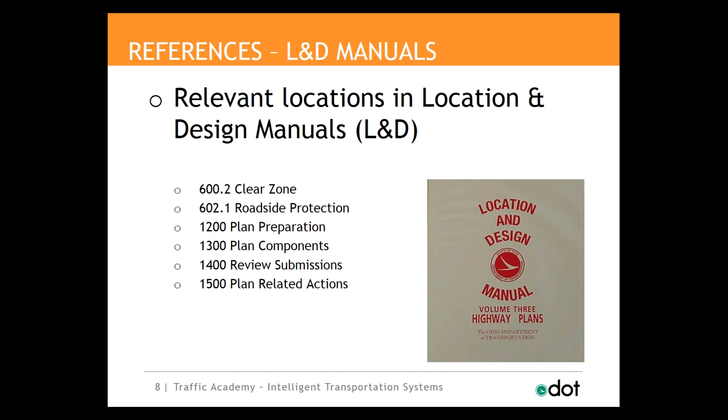The next reference is the Traffic Engineering Manual, which I'm sure many people are familiar with, having likely gone through the traffic signal portion of this course. This manual is a consolidation of traffic engineering policies, guidelines, standards, and best practices. A lot of what we cover today is discussed in the TEM. The main relevant sections within the TEM are Part 1, which includes general information on the manual itself, standard construction drawings, design information, and reference materials. Part 4, which includes information on traffic signals. And Part 13 is where the ITS information is located.

Other parts that may include some information that could be used on an ITS project include the signs, markings, and temporary traffic control device sections. Now, this manual is updated twice a year, in January and July, unless there's a critical update which requires it to be updated sooner.

You should always review Section 800 of the Supplemental Specifications to see what revisions have been made to the remaining specifications. The main specifications you'll need to pay attention to for ITS are Sections 804, 904, 809, and 909. These cover the majority of the ITS devices that will be deployed. You can see there are some other sections with pretty specific ITS applications, but for the most part those other four sections will cover the majority of the devices.

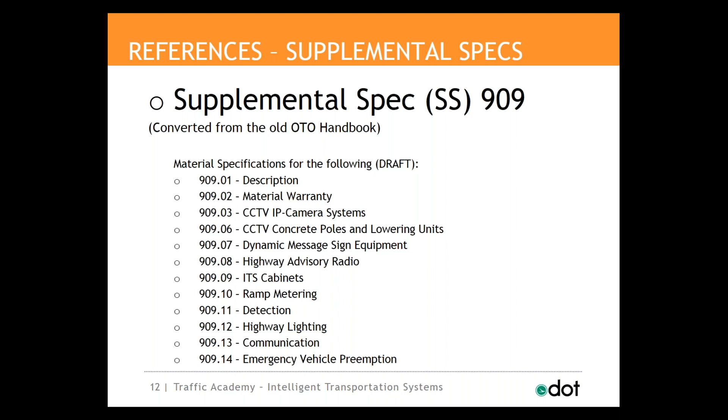Now, there are also standard construction drawings. These details eliminate the need to create new details for each project. They're making it easier to include ITS in the projects by having these standards out there. Certain situations may require slight modifications from the standards, so if that's necessary, they should be modified and included in the plan set. Drawings include CCTV assemblies with both ground-mounted and pole-mounted cabinets, pull boxes and conduits, dynamic message signs, grounding, transformers, work pads and sloped areas, microwave sensors, and ramp meters. These drawings are updated twice a year also, in January and July.

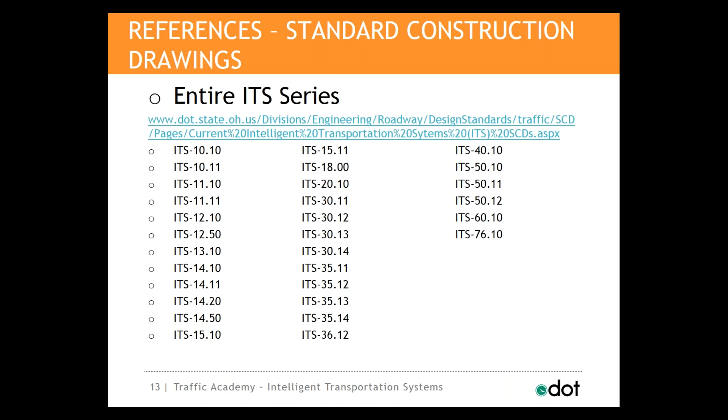Similar to the construction material specification, there are relevant drawings in other sections of the standard construction drawings. Particularly in the highway lighting and the traffic control sections, you can find a lot of supporting drawings that would be used in ITS projects. So as I mentioned before, take a look at other areas, make sure that these associated ITS devices aren't covered in other sections.

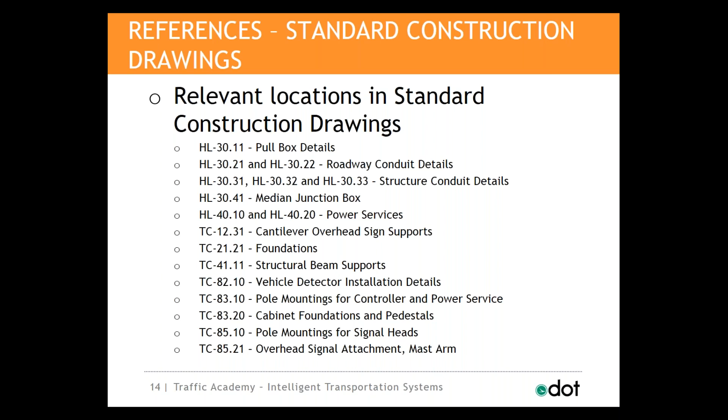Now, there are also some plan insert sheets to take note of. These are not typically used unless there's a unique situation, but they can be found on the Resource Center list under the Traffic Standard Drawings. These may be phased out in the future, but for now they are still out there.

The Traffic Authorized Products list is one of 3 locations where approved products can be found. For a device to be listed on the TAP, it needs to meet the 909 Supplemental Specifications, previously the handbook. There are processes for designers, contractors, and manufacturers to use the TAP.

For designers, not all products on the TAP will meet the needs of an ITS project. So design engineers must confirm that the product on the TAP meets their project needs. If it does not, the designer must follow the guidelines for obtaining approval of the proposed product.

To get a new product on the TAP, there is a detailed product submittal and review process that a manufacturer would need to follow. This is updated quarterly.

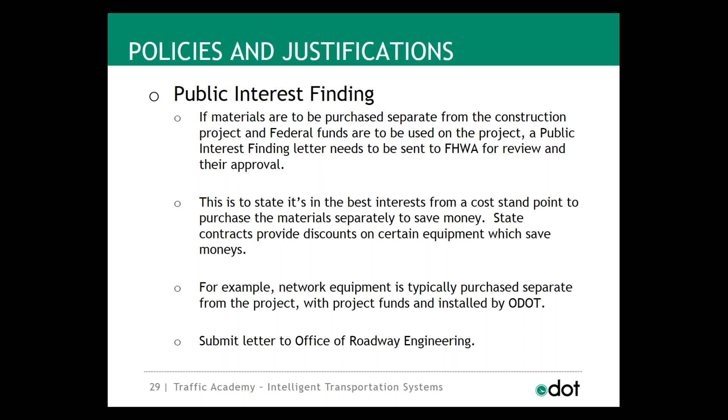True or false, CFR 940 is not required for a project using only local funds.

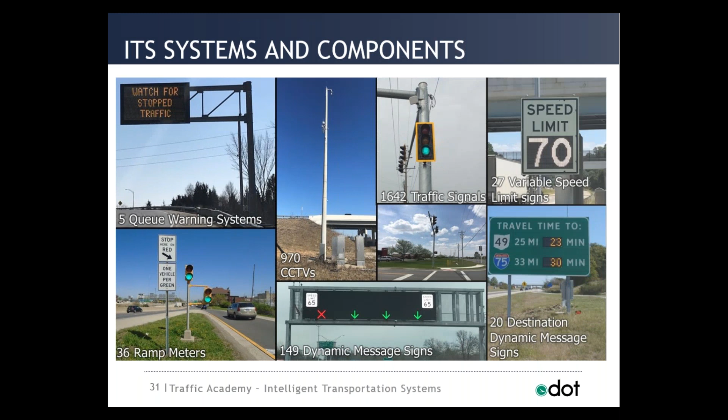ODOT is able to operate and manage these devices around the state at the statewide traffic management center in Columbus. They can control the cameras, provide real-time traveler information messages to the DMS, travel time signs, variable speed limit signs, and to the queue warning systems. The TMC is staffed 24/7.

Operators at the TMC monitor the urban areas of Akron, Cincinnati, Cleveland, Columbus, Dayton, and Toledo. In addition to providing real-time traveler information messages to the roadside devices, they also post information to the OHGO website and mobile app. OHGO features include live traffic camera images, information on freeway traffic incidents and work zone locations, travel delays, and DMS messages can even be seen on there.

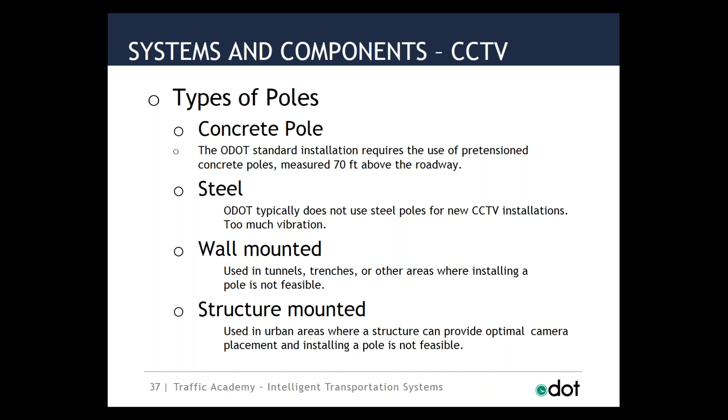So concrete poles are the preferred option in Ohio. In tunnels or other areas where a pole is not feasible, wall mounting is acceptable. Finally, mounting the CCTV camera to a sign structure or other structure, typically in an urban area, can provide the optimal placement when a pole is not feasible. So those are your main mounting types.

With the typical camera being mounted 70 feet above the roadway, including a lowering device on these poles is essential. Very few bucket trucks can reach the top of a 70-foot pole. The lowering device allows the camera and associated equipment to be lowered to the ground for maintenance.

These devices utilize a crank, which accesses the cabling inside the pole via a handhole. The critical design aspect that should be considered is the location of the handhole. This handhole should be a minimum of 90 degrees from the arm of the lowering device, but preferably 180 degrees.

We don't want a maintainer standing underneath the camera being dropped from 70 feet and something occurring which drops the camera quickly onto their head. With the crank, the camera is typically lowered slowly, but accidents can happen. So for the safety of everyone, just make sure the access point is not directly under the camera.

Another point to consider is the orientation of the lowering arm. Since the camera hangs below the pole, there is going to be some blockage from the pole when the camera pans around. The camera needs to be able to see the mainline roadway, merge points, ramps, and crossing signalized arterials. The image that's being blocked by the pole should be either a field or something that is not critical for traffic. And if you're unsure of what areas should be blocked, coordinate with ODOT and you guys can come up with an agreed upon solution.

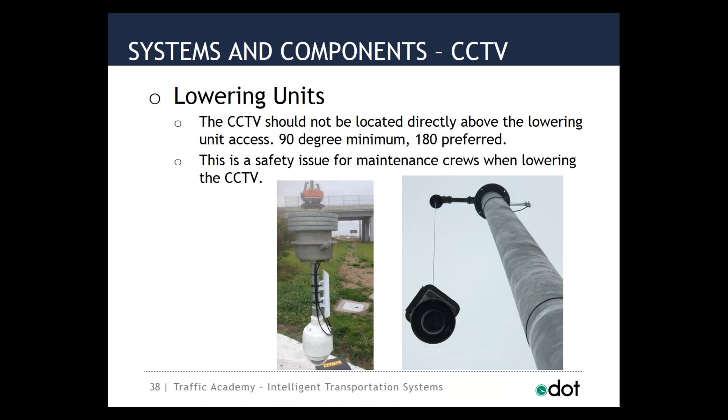Now, ODOT installs various types of cameras. The first and most typical type is a dome camera. These provide pan, tilt, and zoom capabilities, and they're suitable for most operations and have the various mounting types that we discussed.

Next is a fisheye camera, which provides wide-angle views of locations from one camera. They're typically used at signalized intersections and can provide views of all the approaches. Many of these types of cameras can give you a virtual pan tilt zoom to provide a more typical view of the approaches.

Thermal and infrared cameras are mainly used to provide better images in low light and adverse weather condition situations. These can be used in tunnel applications and are also sometimes used for video analytics.

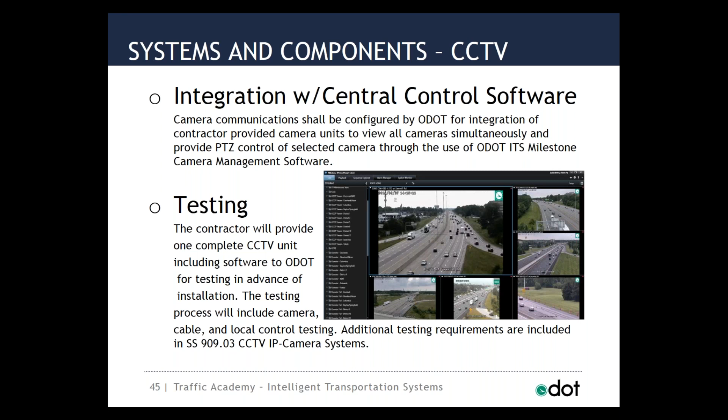All right, moving on to dynamic message signs. These are one of the most visible ITS devices. People driving around may not notice the cameras or vehicle detectors, but it's hard to miss one of these signs.

DMS are key in providing information to travelers and allowing for informed decisions. They can provide travel times to destinations, information on incidents or congestion, and warnings about work zones.

So it's important to note that ODOT does have proprietary approval for Daktronics. All the existing overhead DMS within Ohio are Daktronics. Now there are a few ground-mounted DMS for variable speed limits that are a different brand, but primarily Daktronics is used throughout Ohio.

A monochrome sign has 27 pixels by 105 pixels. This relates to a pixel pitch, which is the spacing from the center of the pixel to the center of the next pixel, of 66 millimeters. The color DMS has 96 pixels tall and 336 pixels wide, relating to a 20 millimeter pixel spacing. So you can see the same size signs have different amounts of pixels.

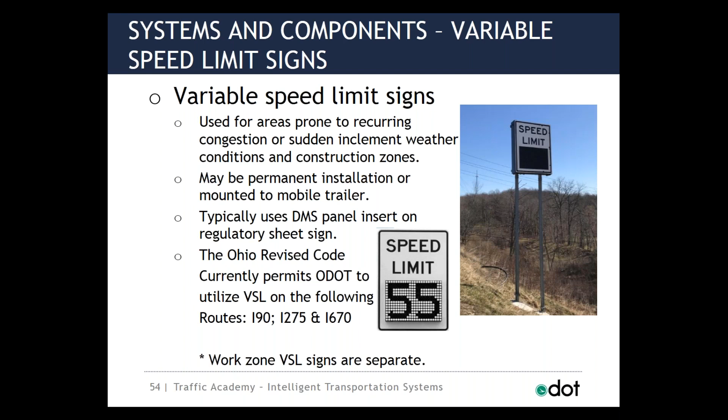Managed lanes are another ITS application used to increase the capacity of an existing roadway facility. These are unique designs, and the Office of Traffic Operations will work closely with designers and provide guidance as necessary for these systems. This is another one where you're going to need special approval to deploy these types of systems.

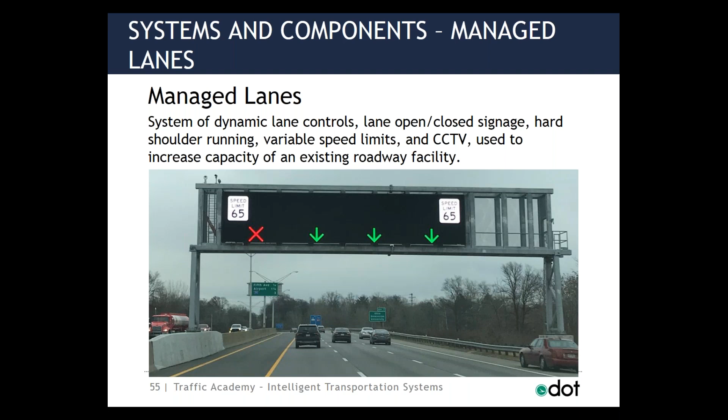ODOT's first managed lane project was the Smart Lane on I-670 in Columbus. This project allowed for part-time travel on the inside shoulder. The photo on the previous page was an image of one of the actual DMS in operation. Gantries were spaced approximately three-quarters of a mile apart, over all the travel lanes and the inside shoulder. Once traffic congestion hits a certain level, the speed limits will be lowered and the shoulder will be opened to traffic as indicated by a green arrow.

Any additional information that needs to be provided to travelers will be posted to the center of the Smart Lane DMS. For this project, there was also an emphasis on camera coverage. If there's debris or a broken down vehicle on the shoulder, the Smart Lane should not be open to traffic. So in addition to the 70-foot PTZ camera poles providing full coverage of the roadway, 3 analytic cameras were installed on the structure to monitor the Smart Lane. Two of these were static cameras pointing in either direction, and the third was a PTZ camera, all focused out over the shoulder.

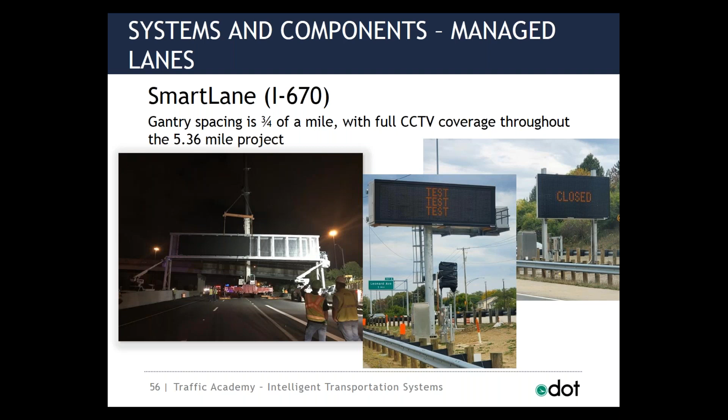Now, there are some other specialized DMS that may be considered on a project-by-project basis. These types of installations should be coordinated with ODOT. You can see some up here, just independent lane use signs or road closure notifications.

Ramp meters are used to control the frequency that vehicles enter the freeway. The goal is to prevent the breakdown of traffic flow and improve the operation of the freeway. ODOT has recently developed new standards associated with overhead mast arm ramp metering installations, instead of the pedestal mount design you can see in the left photo. The installation detail can be found in the standard construction drawings under ITS 76.10.

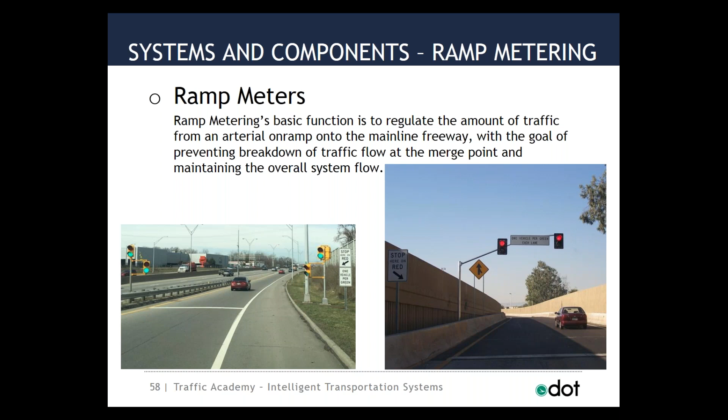Some of the benefits realized from a ramp meter being installed include reductions in travel times, crashes, and vehicle emissions, while increasing vehicle speeds on the main line. ODOT maintains 38 ramp meters statewide currently.

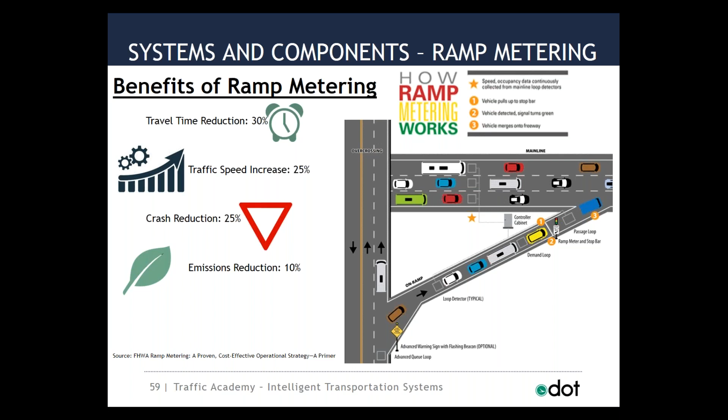Another recent update was the development of guidelines for a ramp meter warrant analysis. These new guidelines can be found in section 1303-11 of the TEM. A warrant analysis must be completed before the installation or design of a ramp meter. There are two types of warrant analyses: one for determining if an existing ramp can be retrofitted with a ramp meter, and the second for determining if a future ramp meter is needed on a project and design.

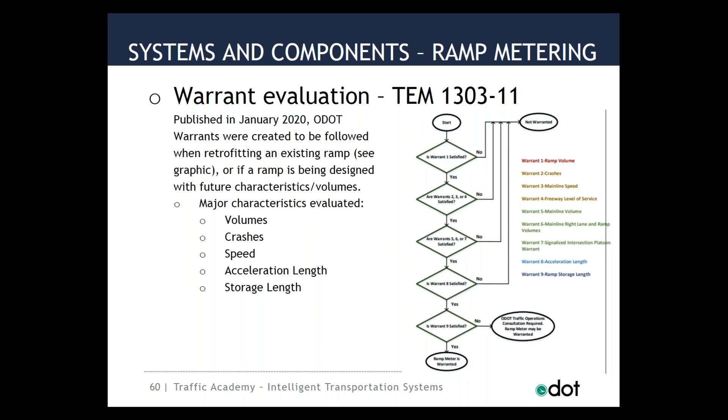The flow chart shown on this slide is for the retrofit analysis. There is a separate flow chart for a future analysis. There are 9 total warrants, including both ramp meter and mainline volumes, crashes, mainline speed, and freeway level of service. Warrants 8, acceleration length, and 9, ramp storage length, are not analyzed as part of the future ramp meter, as it's assumed the proper lengths can be designed into the project, and they're used to verify that those lengths are appropriate.

Another aspect of the future ramp meter analysis is the potential for a phased build-out. The warrant analysis will be completed with traffic data projected both 5 years and 10 years out from the design date. These will be utilized to determine when the ramp meter meets the warrants to be installed. Depending on when it is warranted will determine what components get installed as part of the project. This will ensure that a ramp meter is not installed and sitting idle if it's not needed for several years.

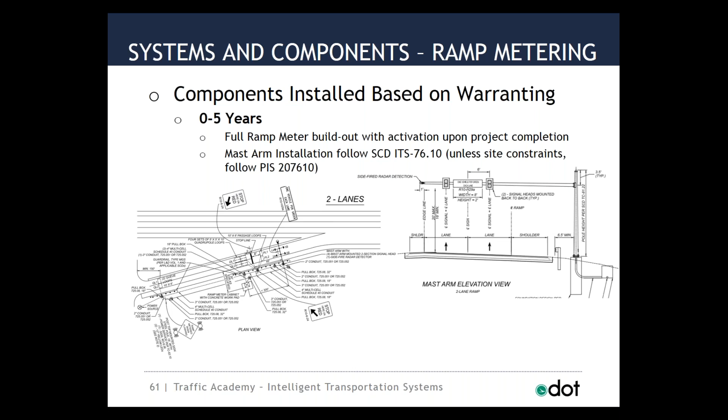If a ramp meter is warranted within 5 years, a full build-out will be included with the project. If it's determined to be warranted between 5 and 10 years from the design date, the project will include a majority of the equipment, but won't include the signal heads, the signs, the wiring, or the cabinet. If the ramp meter is not warranted within 10 years, nothing will be installed. In addition to reducing wear and tear on equipment when it's not needed, this will also ensure that the technology being deployed is the most recent.

Ohio's revised code states that a dark traffic signal indication is a stop condition. Therefore, when a ramp meter is installed, it must rest in green when not actively being used. This is another reason why the signal heads will not be installed too early. The operation is planned for 1 vehicle per green, with the metering rate set to ideally not exceed 15 vehicles per minute, which helps prevent vehicles from rolling through the signal without stopping.

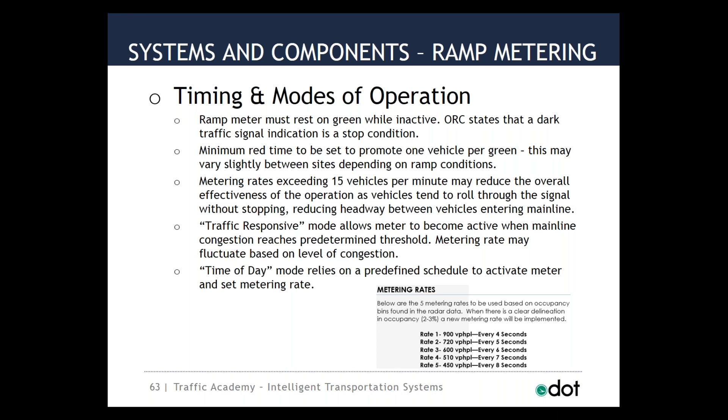The ramp meters will operate in either a traffic responsive mode or a time of day mode, depending on conditions. If volumes are pretty consistent, a time of day mode may work best, versus a main line with large fluctuations in traffic, which would likely warrant more of a traffic responsive operation.

Wrong-way detection systems are deployed on ramps that meet certain criteria. The system is comprised of vehicle detection, a DMS to notify drivers they are going the wrong way, and are tied into communication systems for notification to the TMC. Approval for installing a wrong-way detection system needs to go through the Office of Safety. Additional information is included in Supplemental Specification 809.18.

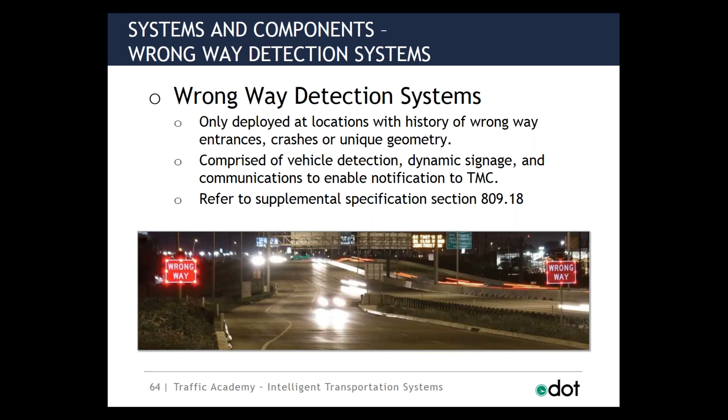Detection for these systems is one of the main components. They can either be radar detection, which requires a dual system for confirmation, or a CCTV camera with video analytics. 809.18 includes the additional information on the wrong-way detection system and all their components.

Truck parking systems are deployed around the state through a design, build, operate, and maintain contract. There are 28 locations with the truck parking signs for about a dozen rest areas that provide parking availability information. So if a truck driver was planning to skip the next rest area and park at the following one, but sees that it's nearly full, he may change his decision and stop at the closer one. Hopefully this is eliminating a dangerous situation of trucks parking on the shoulder and identifying where there's available parking. There are no future expansions of this system planned at this time.

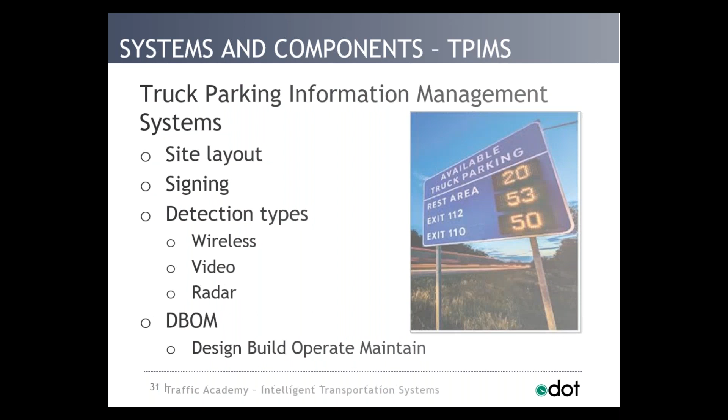A road weather information system collects information on weather conditions at important locations. These systems have various sensors that collect data on temperature, visibility, wind, precipitation, roadway and subsurface temperatures, and in some locations, flood information. This data is used to develop forecasts and disseminate road weather information to help maintenance staff make decisions, including when and where to deploy snowplows and warranting the application of salt and brine to the roadways.

The information is also used to disseminate information via the OHGO website to travelers in order to influence their decisions. For support on these types of installations, contact the Central Office of Traffic Management.

Connected vehicles, which I'm sure everyone knows a lot about, but this is essentially the use of technologies for vehicle-to-vehicle, vehicle-to-infrastructure, and really vehicle-to-anything communications. The CV infrastructure term is applicable to both roadside units and onboard units. In Ohio, Drive Ohio handles all CV applications. So if you're working on any projects that incorporate CV technologies, notify Drive Ohio and coordinate with them.

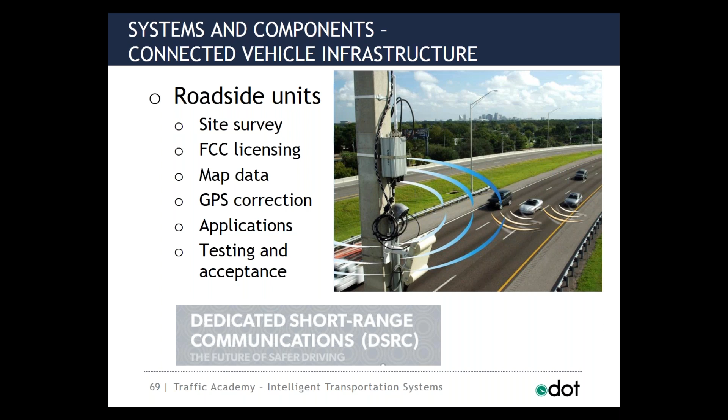The other piece is the onboard unit, which goes in the vehicle. This will have a human interface device to provide information from the roadside unit. Right now, signal phasing and timing and basic safety messages are the main information being provided, but these applications are being expanded every day.

Finally, we'll briefly discuss a technology that is being phased out by ODOT, Highway Advisory Radio. With many of the new ITS devices, this technology is becoming obsolete. So as parts fail on the existing equipment or a sign gets hit, the locations are being eliminated.